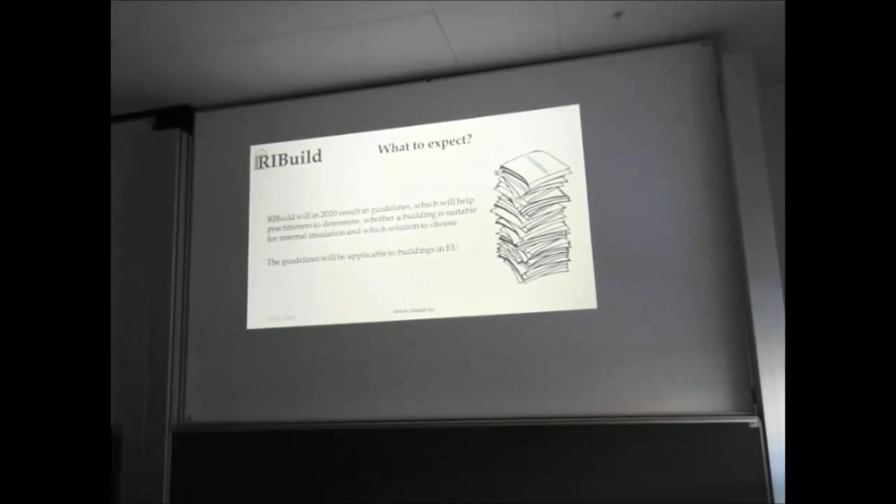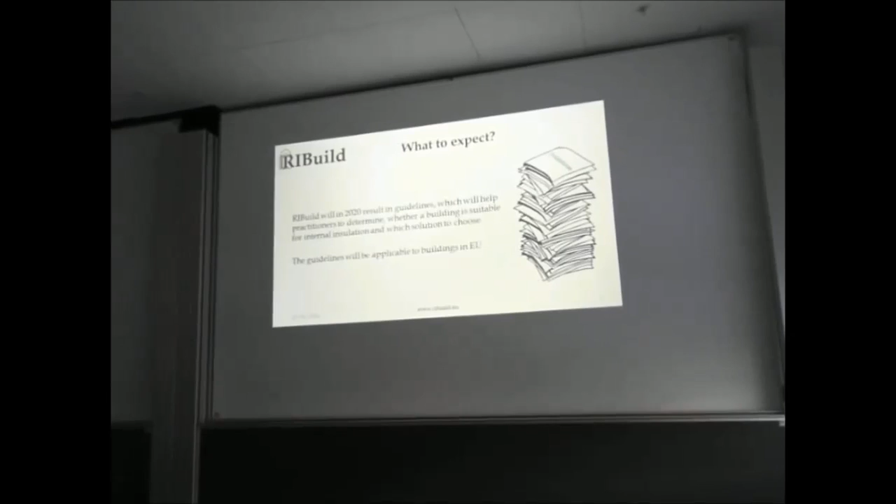RIBuild will in 2020 result in guidelines which will help practitioners determine whether a building is suitable for internal insulation and which solution to choose. The guidelines will be applicable to buildings in the EU.

There are some limitations. We are only looking at EU countries. We are only looking at buildings built before 1945. And we are only looking at heavy external walls made of stone, brick, or half timber.

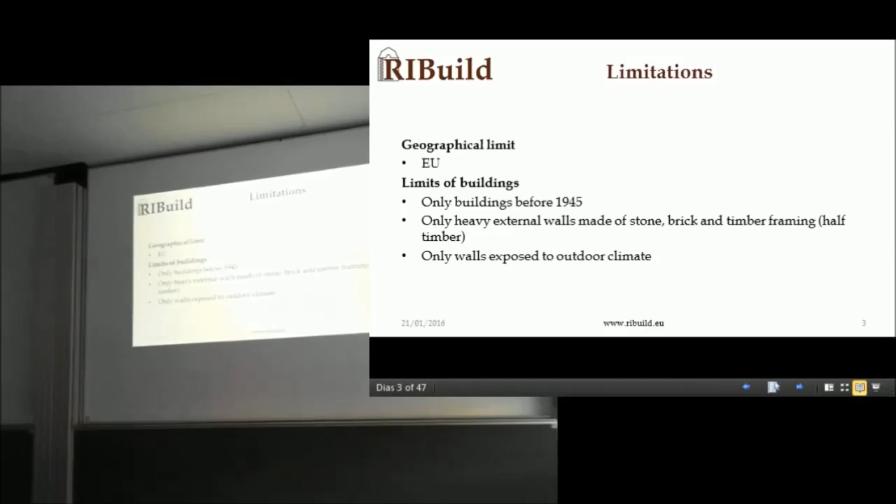And we are only looking at walls exposed to outdoor climate. So we're not looking at walls between a colder or warmer room inside the building - only at the perimeter of the building.

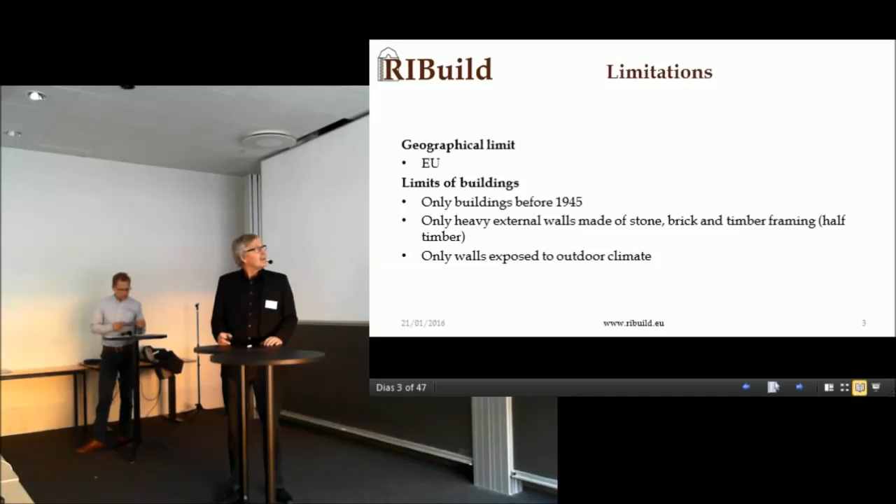The following slide is an example of how the user interface could be for such guidelines. So what we think is that we build the guidelines into a user interface, so you will not see them as guidelines, but as information as you go through this process.

With the knowledge we have up to now, I believe that you can put internal insulation on all walls.

But it's just a matter of how many millimeters. Maybe if you go through this exercise, you will be told that you can only put 5 millimeters of insulation on your wall.

But this is kind of what I think now. Maybe we'll get wiser later on. But this presentation is made from that context.

So actually what we come up with is a number of millimeters of internal insulation which can be put on an external wall of a specific building.

So what we think is that first you have to put in some data on the building you want to look into, and afterwards you decide what interior insulation you put on.

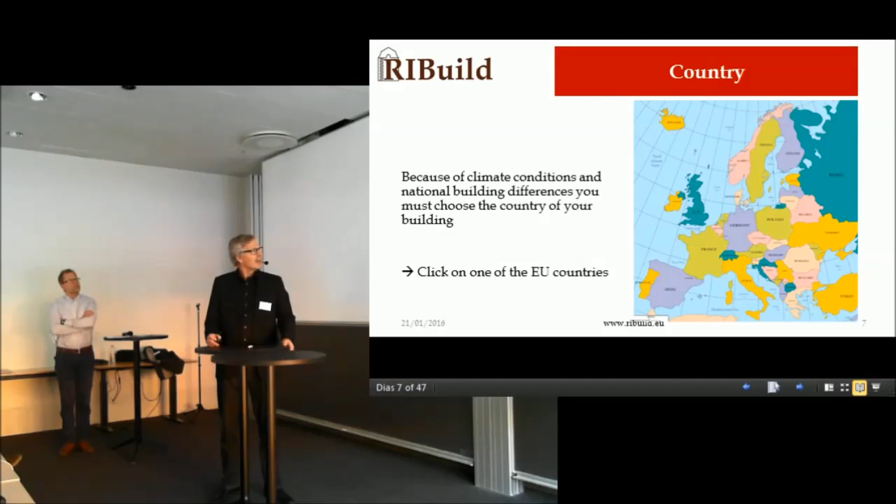We also think we should choose a climate zone in a country. So since we are in North Jutland, we choose climate zone 1.

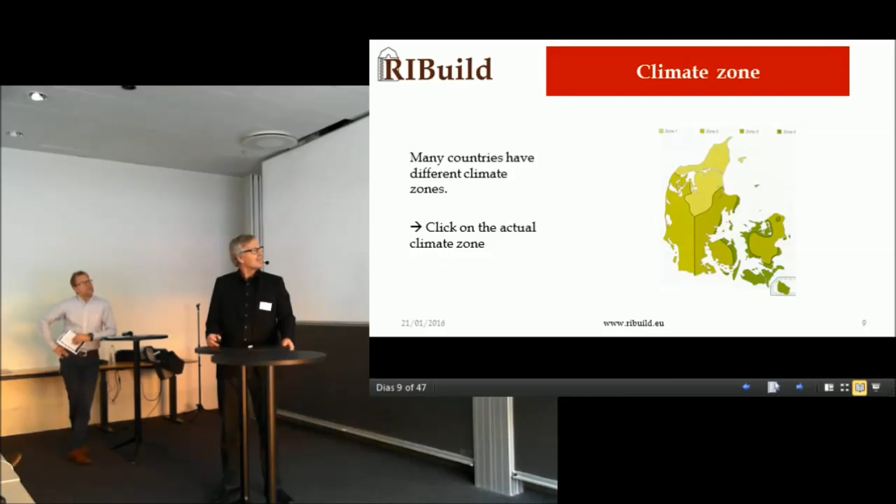We think also the orientation can have an impact on hygrothermal conditions. Every orientation is added and calculated individually.

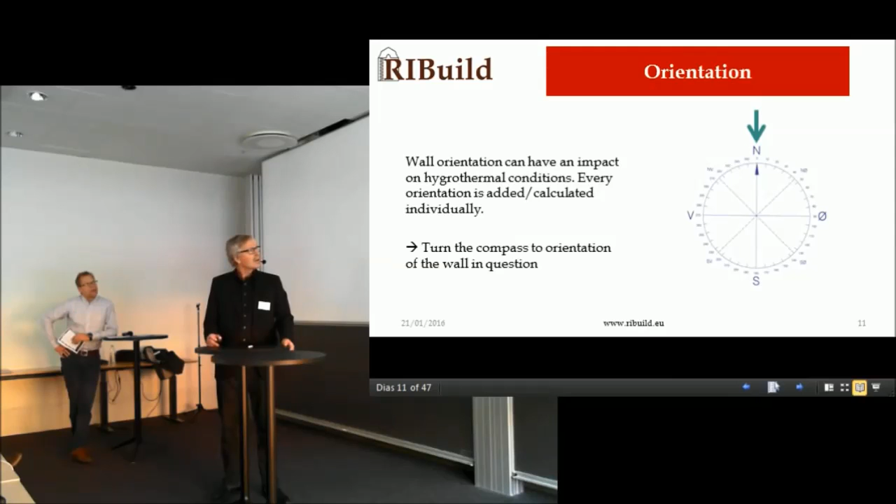So if you have more walls, and you often do in a building, you have to calculate each wall. So the next thing is you turn the compass to the direction of the wall. We choose a surface of the wall facing 240 degrees, southwest.

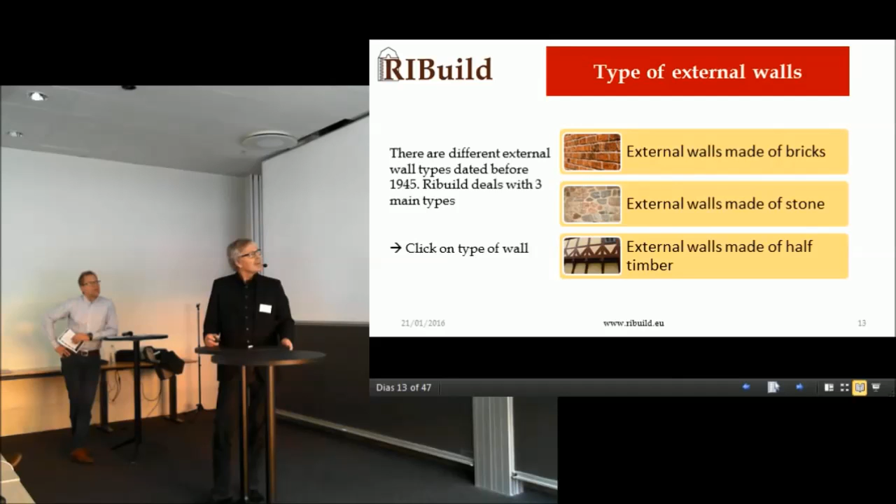And then there are different external wall types dated before 1945. RIBuild deals with three main types, and we choose the external wall made of brick.

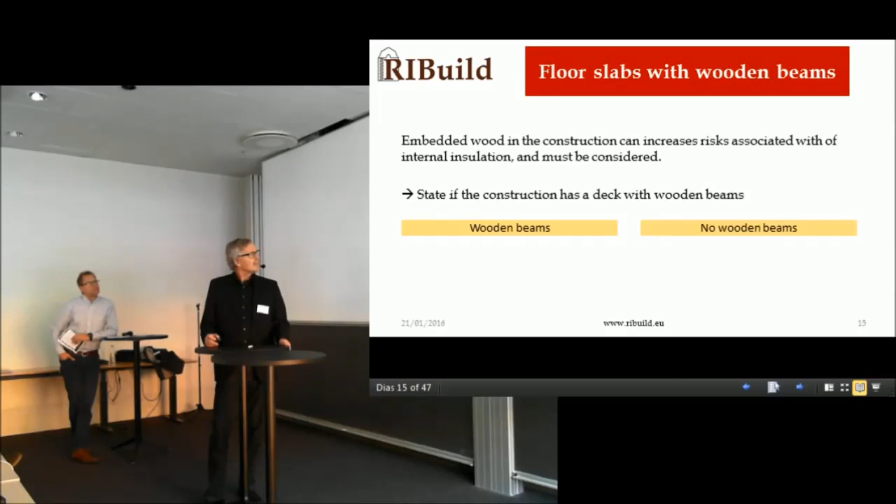And then we have to tell the database if you have embedded wood in the construction, it can increase the risk associated with internal insulation, and this must be considered. So you have to choose whether there are wooden beams or no wooden beams - we think there are wooden beams.

Then we think it can be important when the building was built, within these three periods, when you are in Denmark, because we have some legislation from these times, and that could be different in other countries.

So maybe there will be other periods in other countries. In this case, we choose 1889 to 1945.

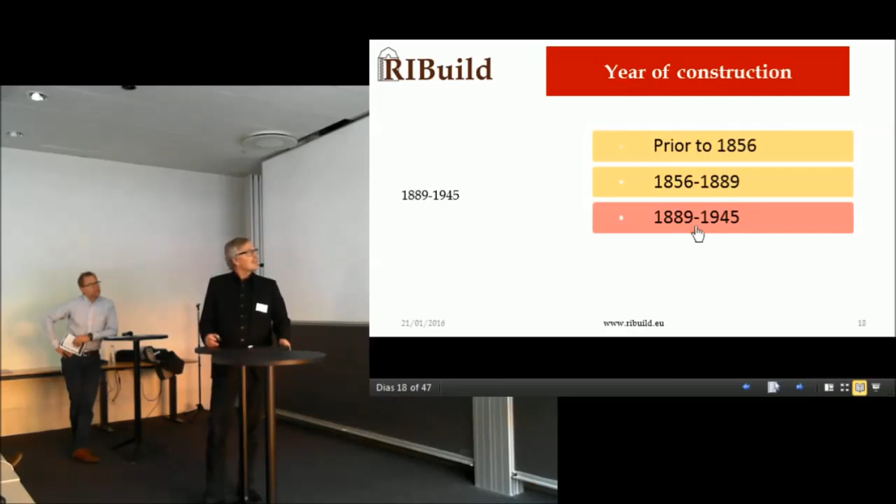And then the condition of the facade can be vital in regards to internal insulation. So you have to make sure that your facade is intact. If not, proper repair must be made.

And if you want to know more about that, then you click on 'the facade is damaged,' and there you will get information on what you should do in order to put on interior insulation.

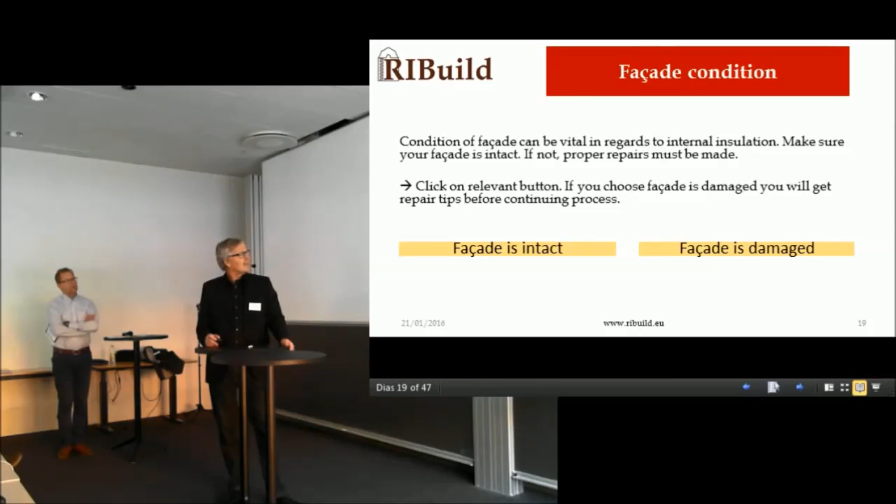Today, I believe that if you have a deteriorated facade, you should not put on interior insulation. So we say that our facade is intact, and prior to internal insulation, the interior walls must be stripped clean.

We heard probably from the last presentation that this has been done, and therefore, if you have already done that, you can click 'the interior wall is ready for insulation,' or if not, you click 'is not ready,' and then you will get information on what to do.

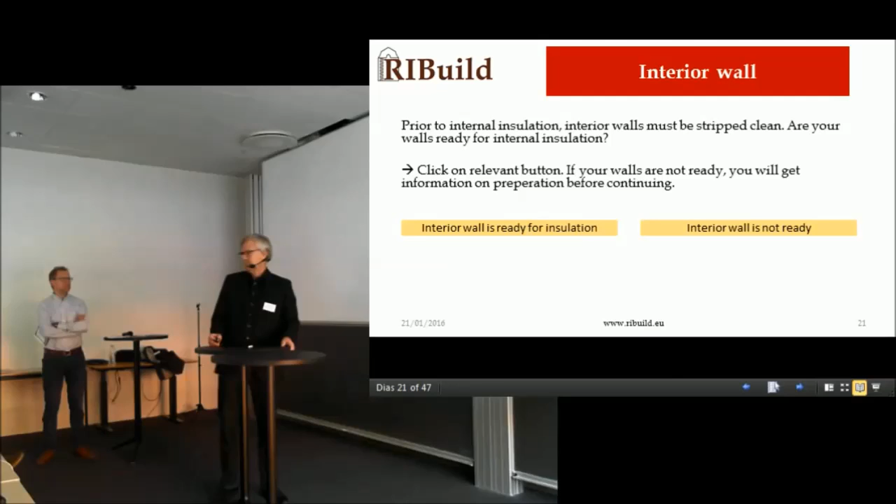So we choose the interior wall is ready for insulation. The exterior surface of the building has influence on the hygrothermal properties of the wall. Since we choose brick wall, exposed brick wall, it can either be exposed, impregnated, painted, render, or render with paint. We choose one of these, and in this example we choose exposed.

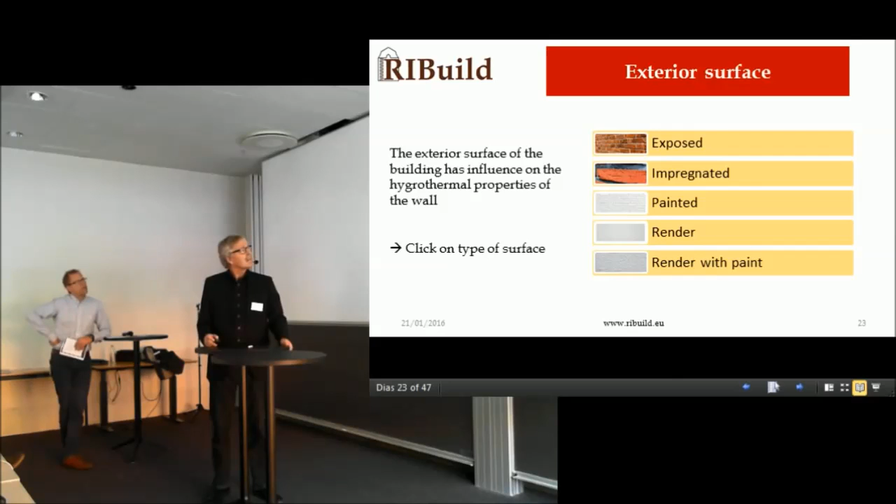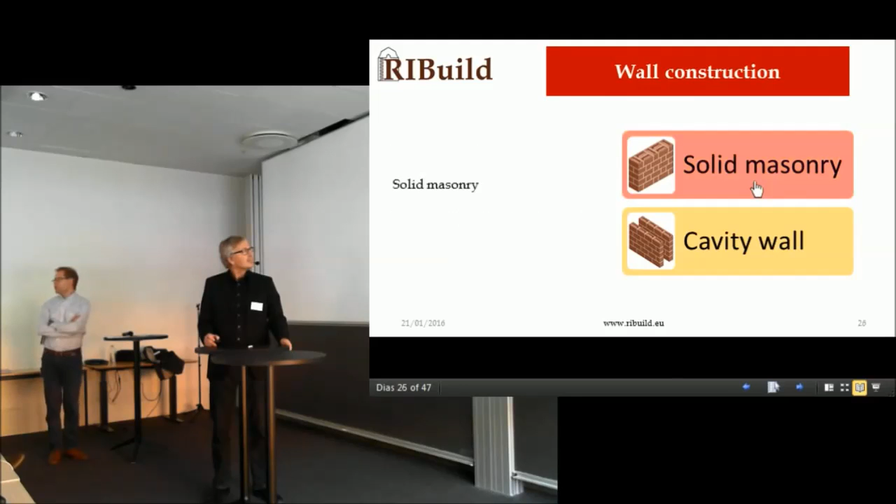The type of wall construction is essential for the insulation, so whether it's a cavity wall or solid masonry, we choose solid masonry. Then the thickness of the wall also has an important influence. Here in Denmark we used to talk in half bricks, so I have done it this way, but it could also be done only with millimeters. We choose a wall which is 1.5 brick thick.

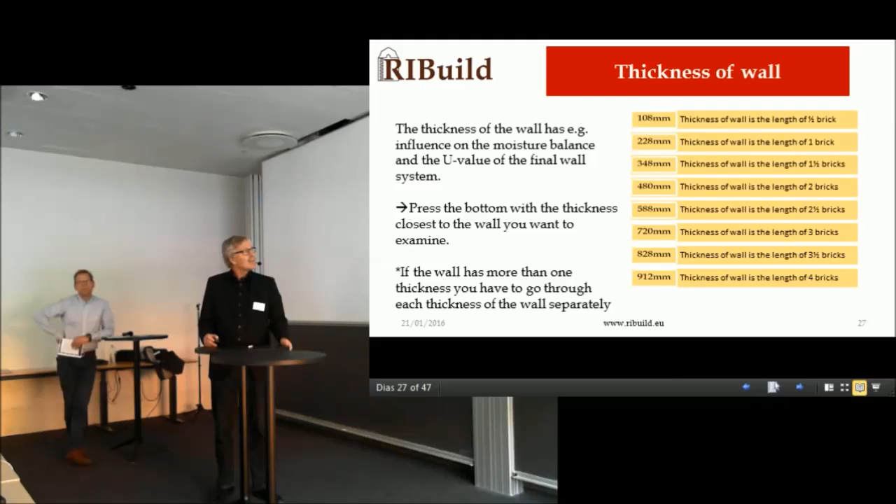Then the capillary suction of the exterior surface determines the impact of external water sources, for example wind-driven rain, which is quite important when you put up interior insulation. So we recommend that you go out with this small piece of plastic, this Karsten tube, and by clicking on the link you will be told what it looks like, where you can buy it, and how you do it. You just glue it to a brick, put some water in it, let it be there for 15 minutes, and you find out how many milliliters of water has been absorbed, have been drained away from the tube.

You put that number into absorbed water, and then you measure. There will be a wet ring around where it's fixed, and you measure the diameter of this ring. You do that for the brick, and you do it for the joints, so you also put it where you have two joints. You put in the measured data, say OK.

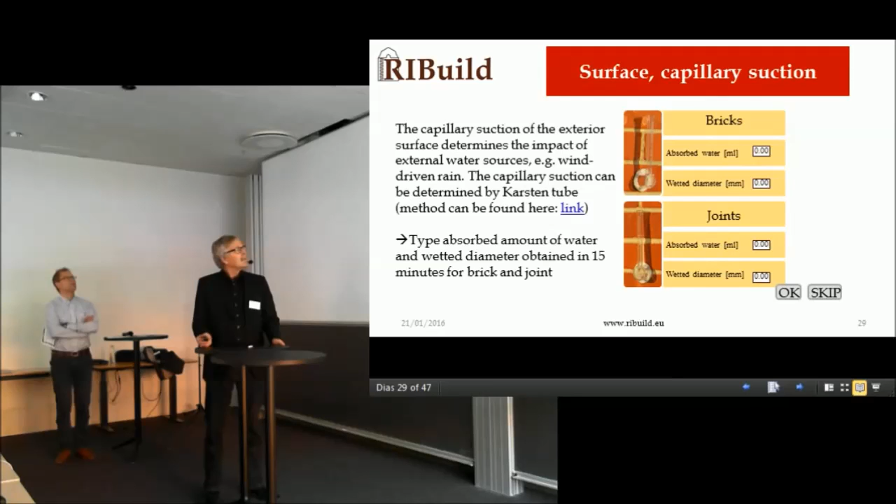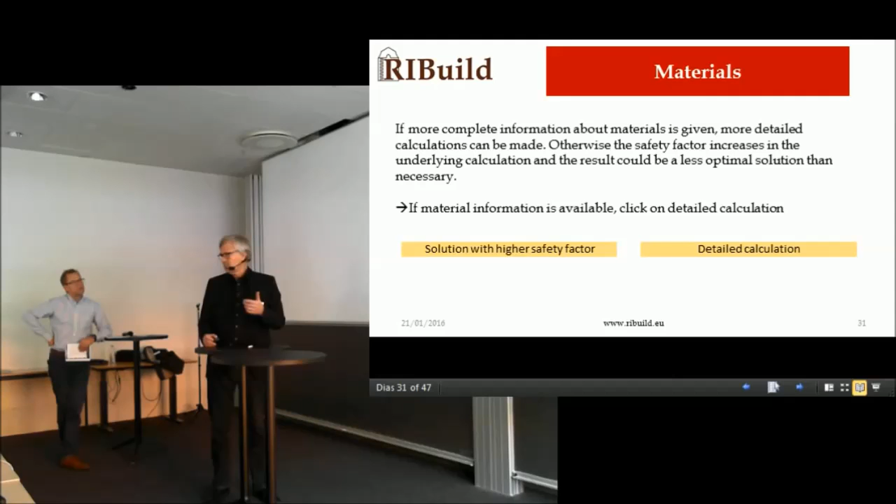If more complete information about material is given, we can do more detailed calculation. Otherwise, the safety factor will be increased in the database, we will use kind of worst case. But if you have materials with better data, then you will probably get a better solution, meaning that you can put more millimeters on the wall.

So in this situation, we choose that we have detailed calculation. But if not, you will just get, maybe you could have had 50 millimeters, but now it will come out with 40 millimeters, because we're taking the worst case.

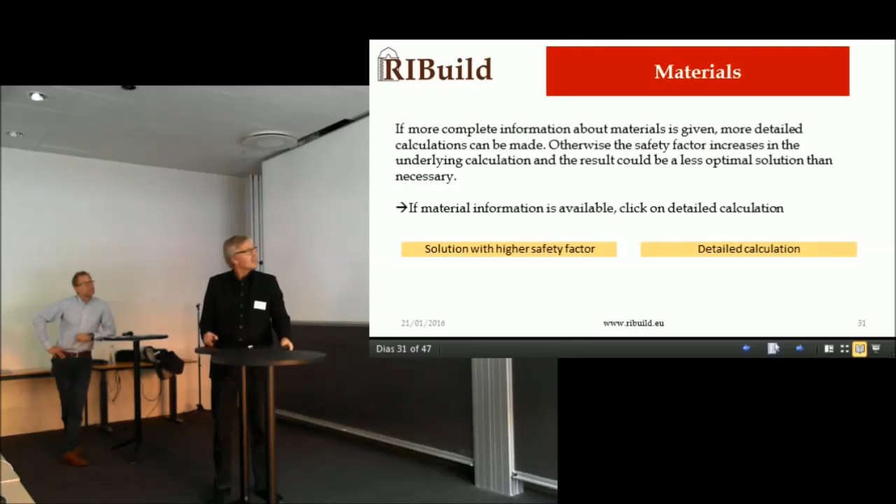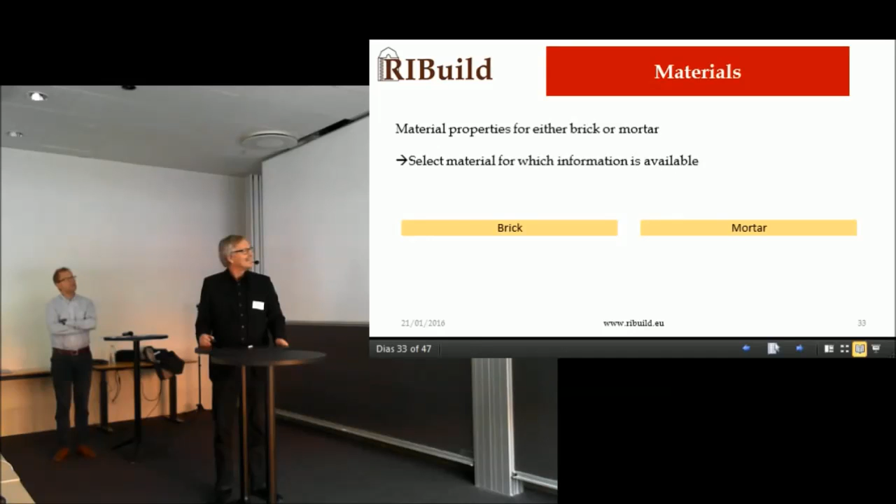So we choose this detailed calculation, and then we should talk about the brick or the mortar, and we choose the brick. You can put in a lot of good data, so you get this better answer. And you can click on the method, and you will get information on how you actually do this calculation, or how you get this information.

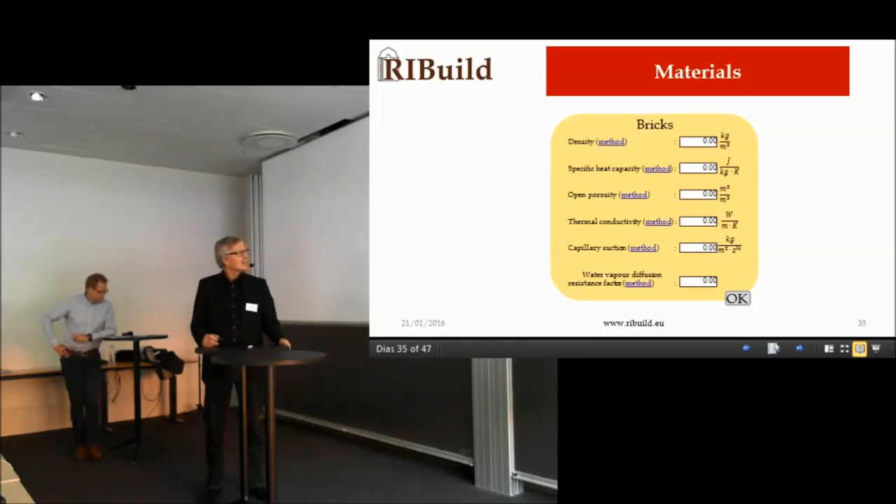But it's not only calculation; it's also to make some experiment with materials. Not many are doing this, so it will be a kind of special way of doing it. But let's say that we have all this data: the density, the specific heat capacity, the open porosity, the thermal conductivity, the capillary suction, and the water vapor diffusion resistance factor. We put this data in and say okay.

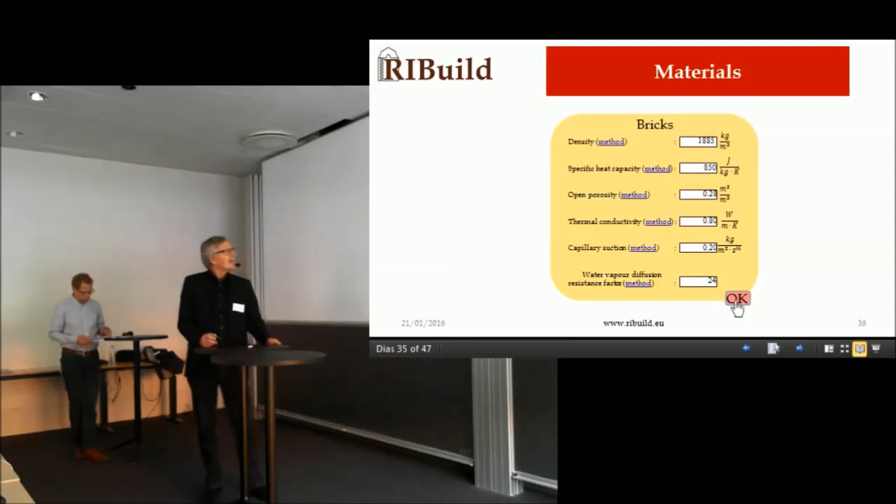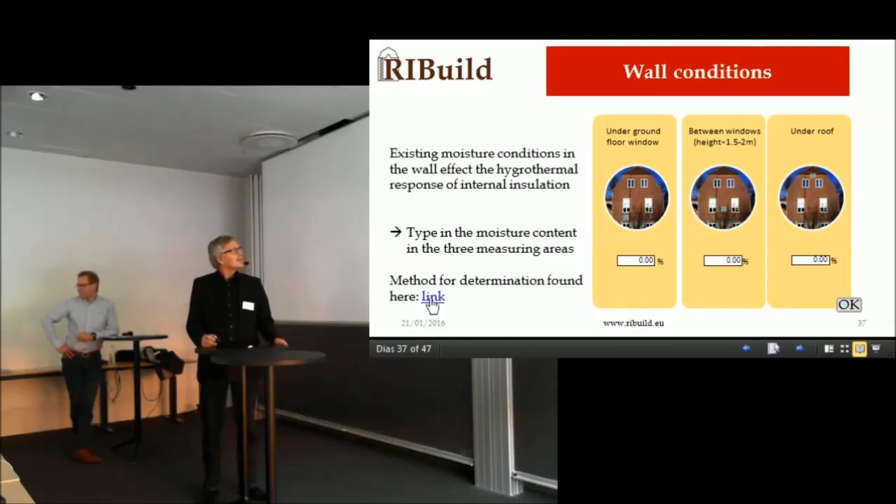Existing moisture conditions in the wall affect the hygrothermal response of internal insulation. So type in the moisture content in the 3 measuring areas. How do we do that? We click on the link, and we use this very simple method by using a 10 millimeters thick and 10 centimeter long drill. We take out the powder from the brick, and we put it into a sealed test tube and send the sample to the laboratory. This way you will get an answer on how wet the wall is.

When you have done that, you go back and fill in these results you have received from the lab. In this case, we recommend that you do it under a window, between some windows, and under the roof somewhere.

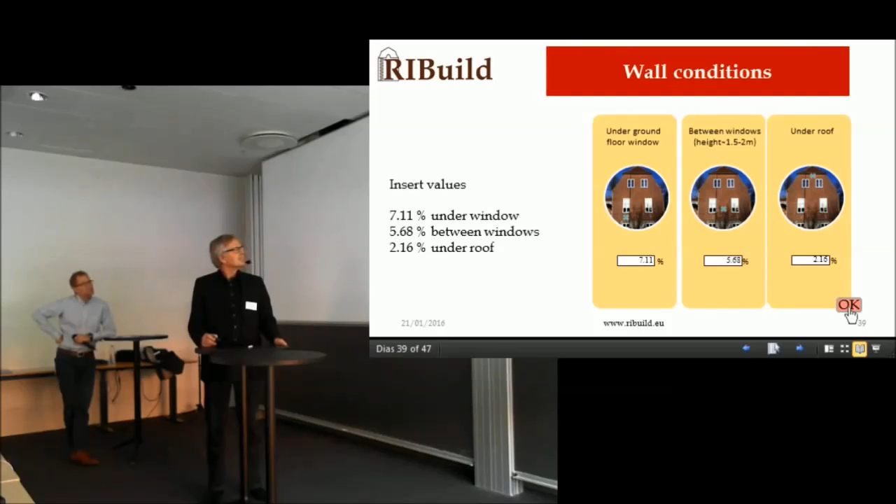Now there is a summary of all your input, and since we did all these material parameters, we have all this, and we have also measured the moisture, but otherwise this data is what we get if we get the quick way through. Now we continue to the choice of interior insulation.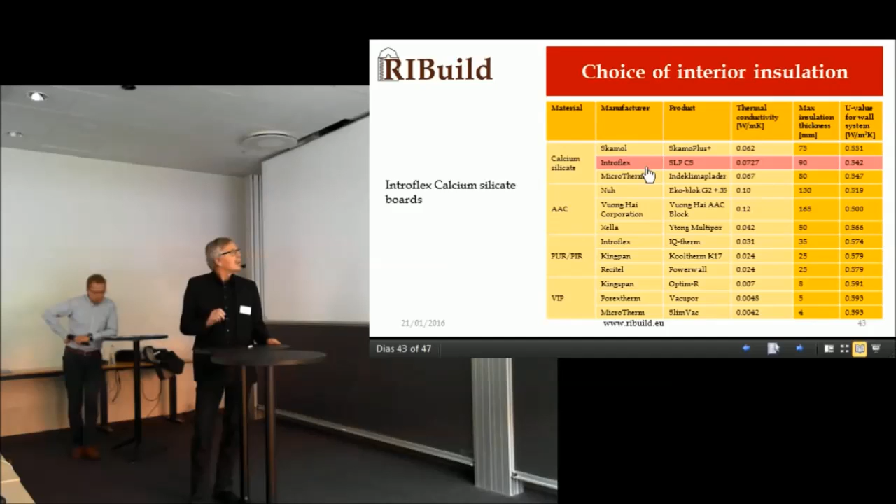So if we choose Introflex, we can put 90 millimeter insulation on the interior surface, and we will get a U value of 0.542. And then we put this wall, then we click on Introflex and find out that they don't have 90 millimeters. Shame on you. So what do we do? We choose 30 and 50, that gives 80. So actually we have less insulation now if we choose this material than we can have.

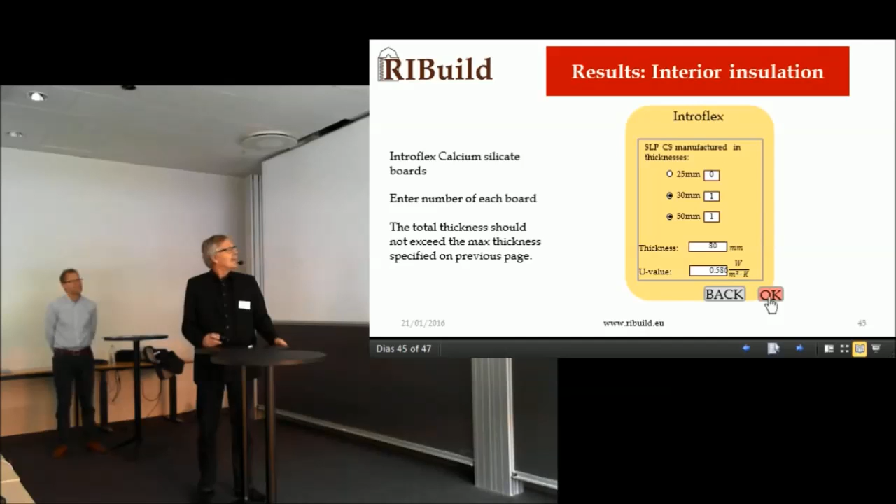Then we have calculated one wall, and then we do it with the other walls also, and the total will come up here. So we add more walls, and now we have the total of these 4 walls.

So we are having a heat loss reduction of 742 kilowatt hours per year. We will have an annual CO2 reduction of 125 kilos. And our emission from production of the material will be 416 kilos.

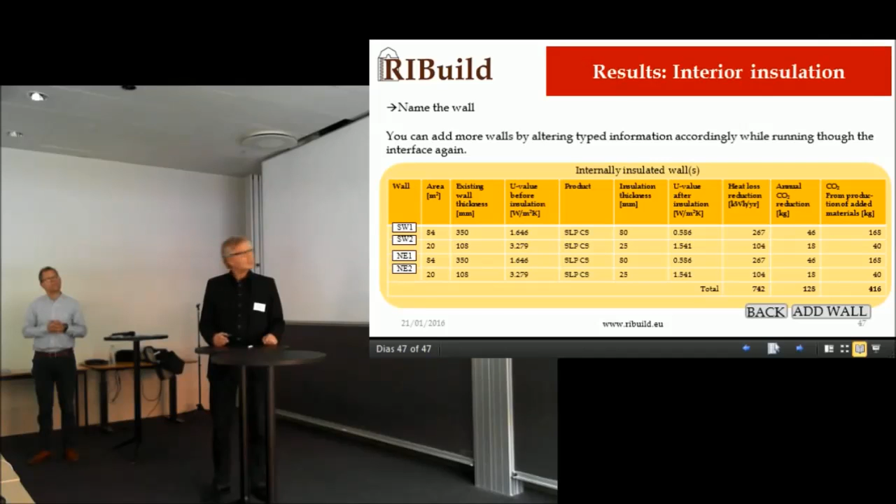I'm not guaranteeing the figures here. So this is actually what I would say about this: that could be a user interface in the future when we know how all these different elements work - exterior, water, interior, humidity and so on.

Thank you very much, very simple and a nice shortcut to a very difficult decision. Who is the target group for this software? This is the practitioners. So we're talking about skilled people using this. Yeah, skilled people.

Interesting, you guidelines, your comments please. Do you buy this product? Are you ready? Are you the target group for this? Any considerations here?

A simple question about the measure of the walls. Would you have to put in the value of the thickness of the walls? Mostly buildings have different thickness depending on where, on which story, you're calculating. So do you make a calculation for each floor, or do you take all the thicknesses and divide by the stories? No, it was said in the slideshow that you actually have to go through this exercise with each thickness of wall.